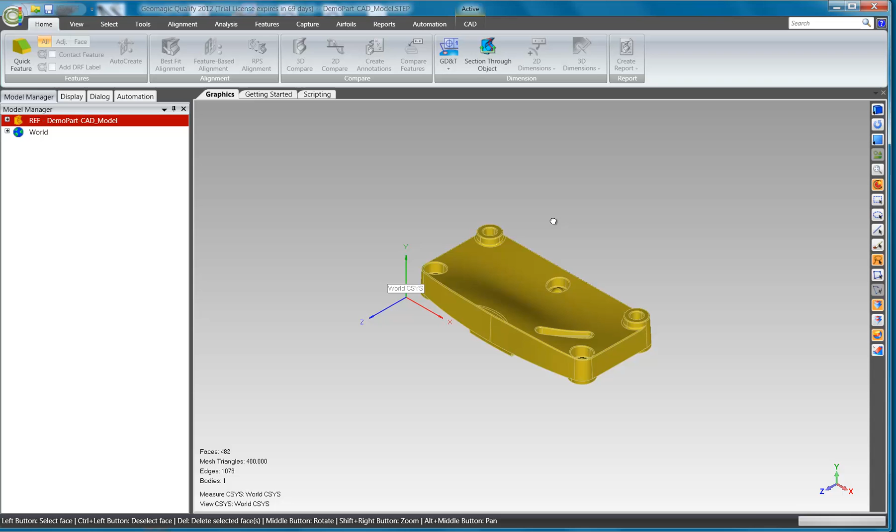First things first, when we're using Geomagic Qualify Probe, we want to import our CAD model, which I have here sitting on my screen already.

Then we will want to make sure we have our microscribe digitizer plugin set up. We'll go to the Start menu, Options, then go to Digitizers, and make sure that the hard probing plugin is microscribe version 1.0. Press OK and we're ready to begin.

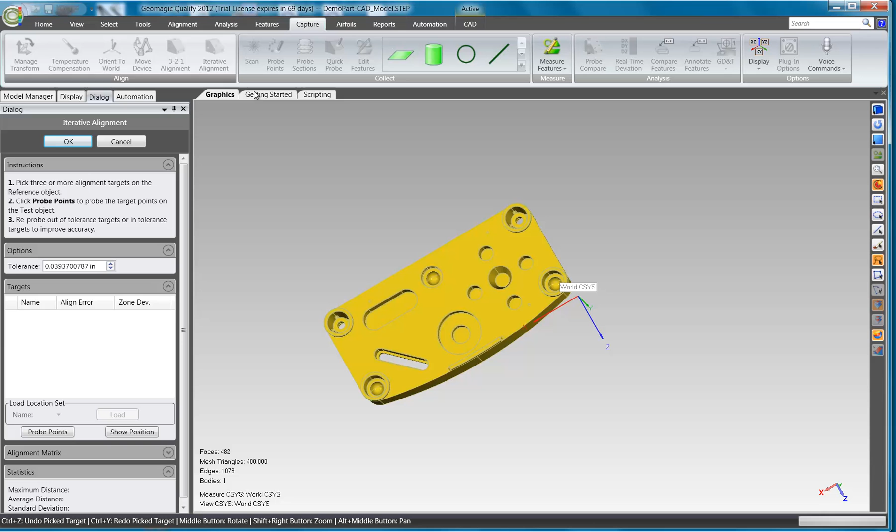We'll start by using the Capture tab, and for Geomagic Qualify Probe users it will be under the Alignment tab, but we'll be using the iterative alignment. This allows us to create target points on our CAD model that we can reference on the actual object sitting on our desk to align this part.

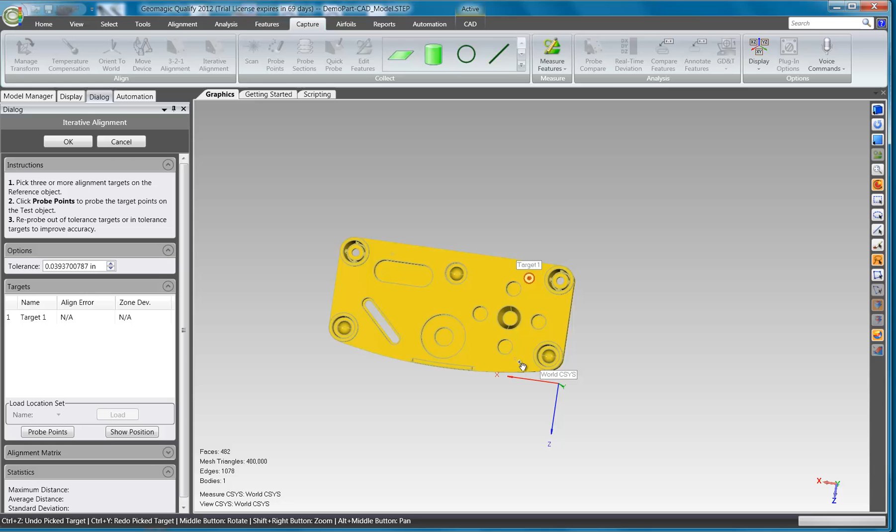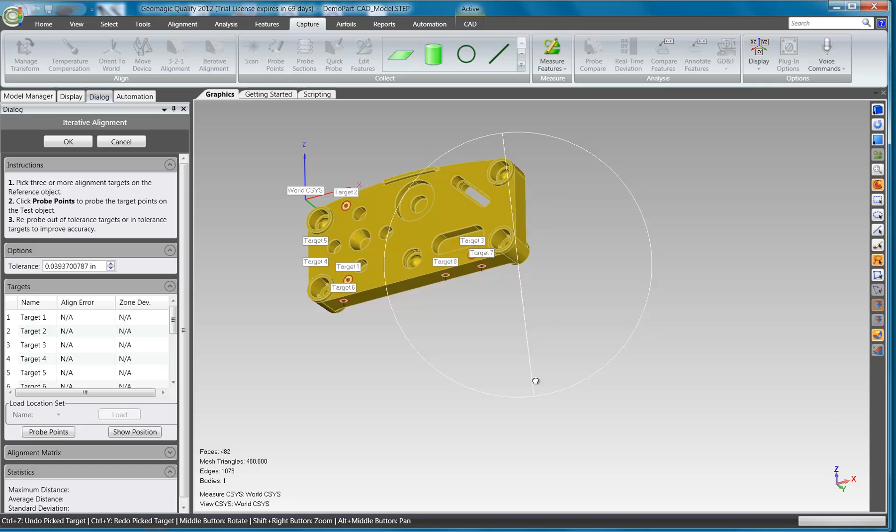So we'll simply start by creating a few targets. Place one here, one here, one here. Go off to the side, place a few targets, go around back, place a few more. What we want to do when we create these targets is make sure we have a good reference plane and good driving points that will allow this CAD model to fully align to the actual part.

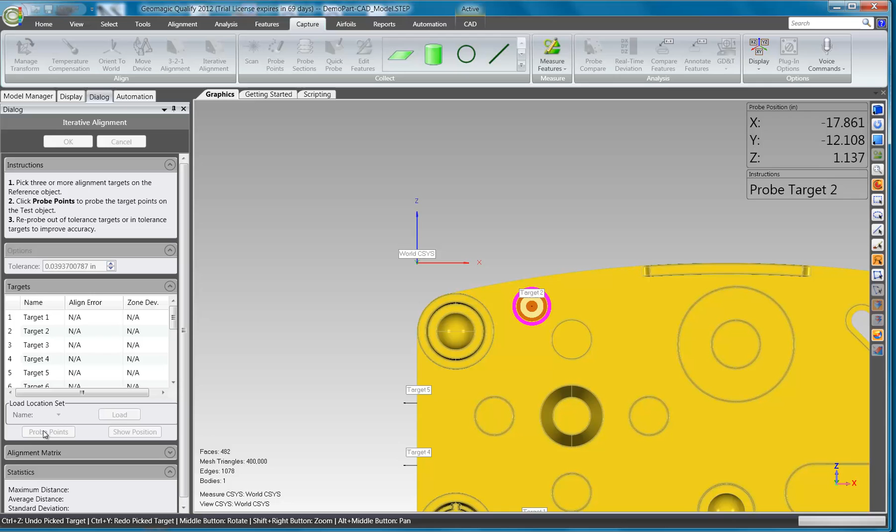We'll take just a few more points and then go ahead and probe them too. To probe the points, we'll press Probe Points, and it brings us down onto target 1, which is the first target we created, and we will take a point. For the first 3 targets, we'll just have to get close to where we put them on the CAD model, and that will give it a basic alignment. Once we do that, it brings a probe into place that we can use to get close to the part.

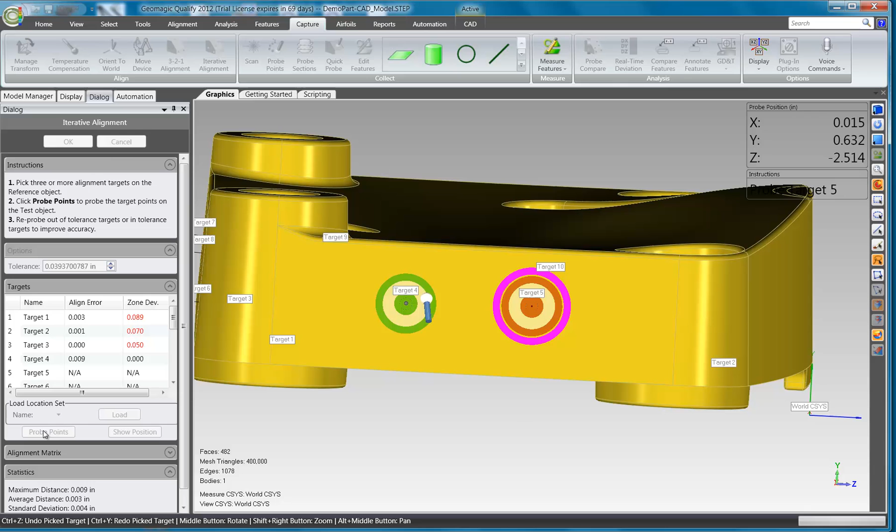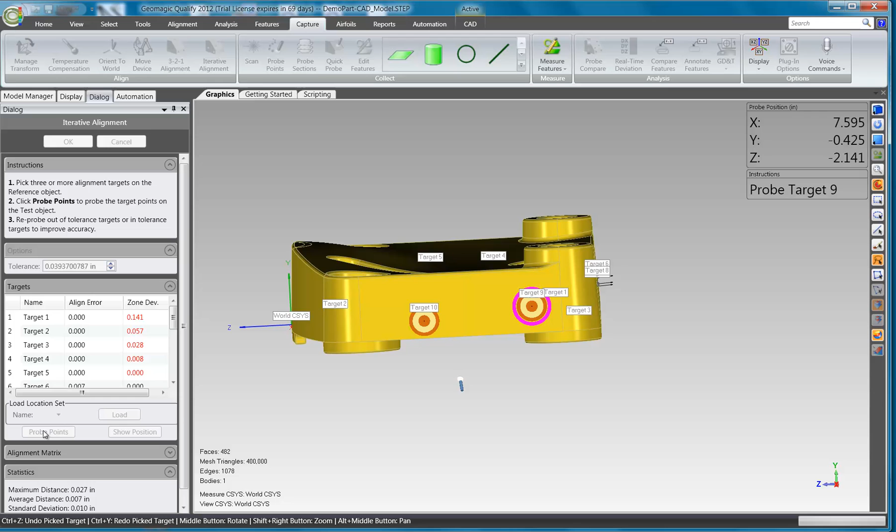You can see it lights up green when we're actually within the target specification for tolerance. We'll come in here and take a few more points. We'll also note that this procedure will fail the first time, just because there's no way we can get the first 3 points absolutely perfect unless we're very careful. Just keep that in mind when we're doing this.

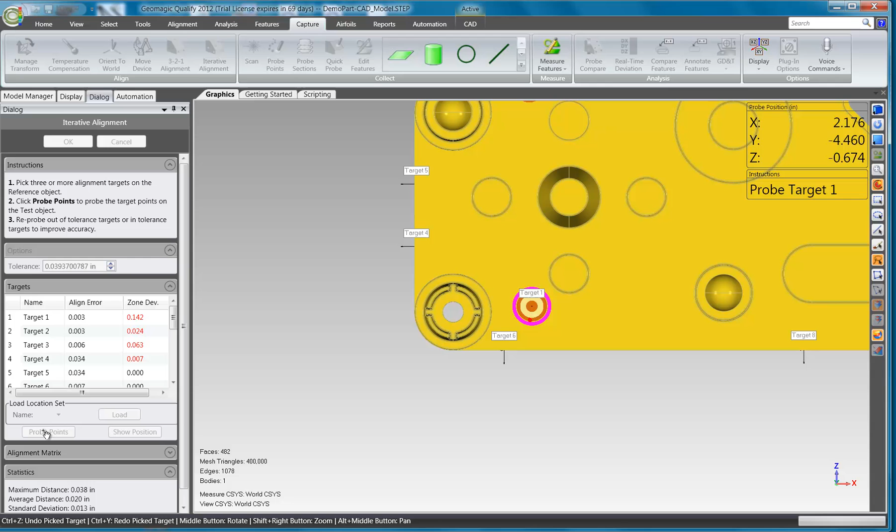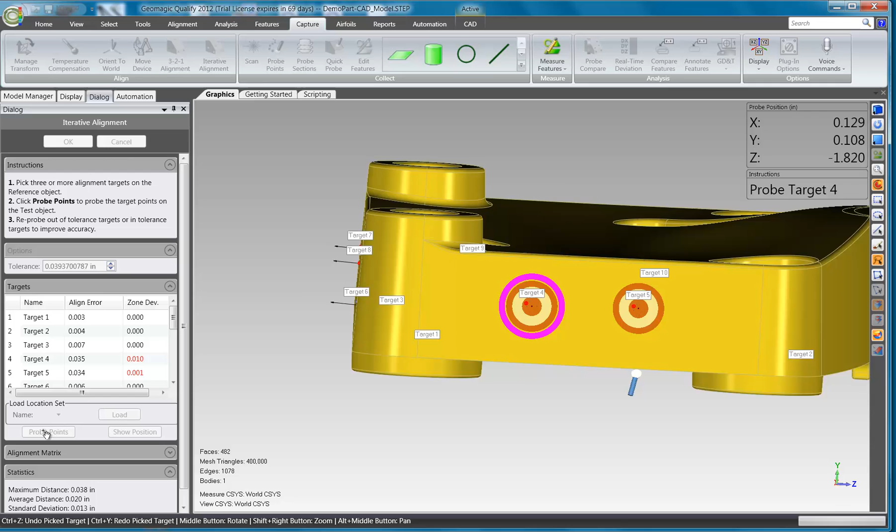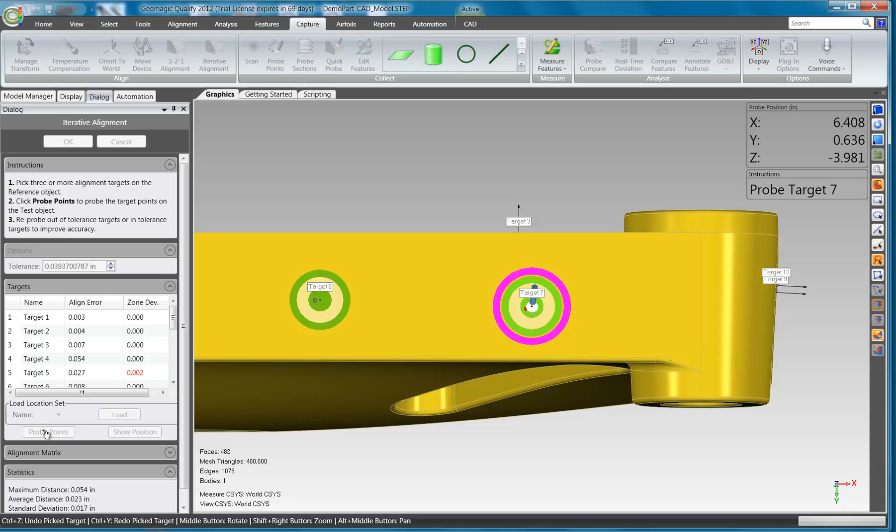So it says it failed. We want to do these points again, which is fine: target 1, target 2, target 3, target 4, target 7, target 8, and now we are fully aligned.

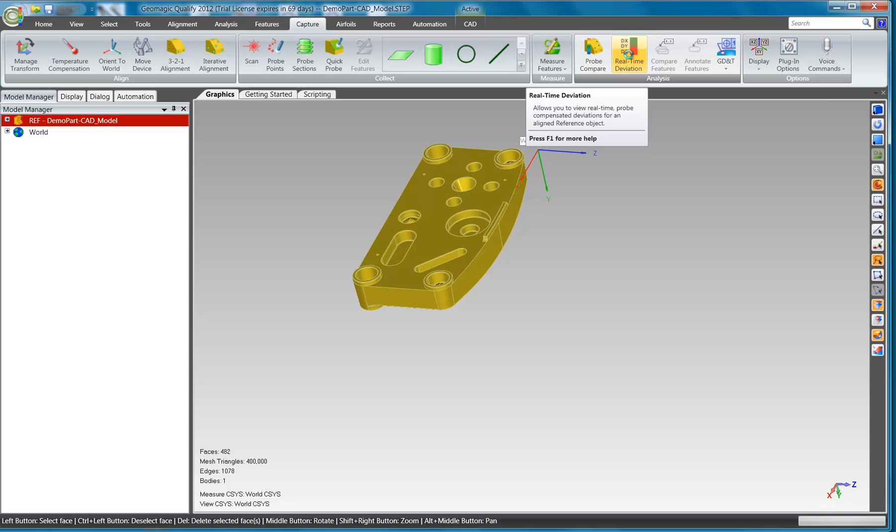Now that we're fully aligned, we can press OK and start taking a look at our model. So we have a few different options. We have our real-time deviation that we can use to look at the model, which is just a real-time go/no-go gauge. You can see when we come down onto the part, it gives us our tolerance, and it says that we're good to go on this surface.

If we come off of the part, you can see that's obviously a no-go. So this is an easy way to come in and check if things are where they need to be. We can see that we're out a few thousandths on this bore. However, on this surface, we're also a little out as we go off to the right of the part, and as we move to the left, we come back into tolerance. So there's a little bit of warp going on as we get further to the right of the part.

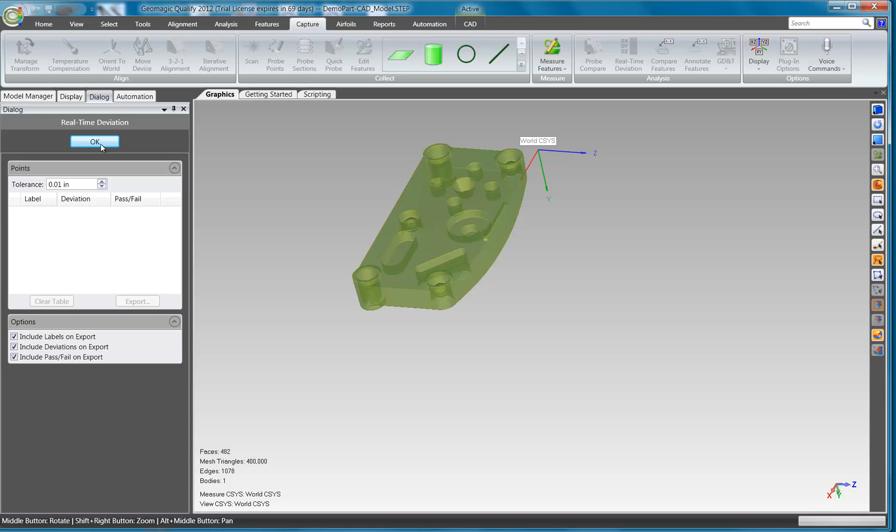So say we want to further analyze that information. What we'll do is come in and use probe compare, and use it to first set up our tolerances. Let's say our tolerance is 7 thou for our nominal, and for our critical numbers we'll run that out to 20 thou. Alright, and then we will start probing.

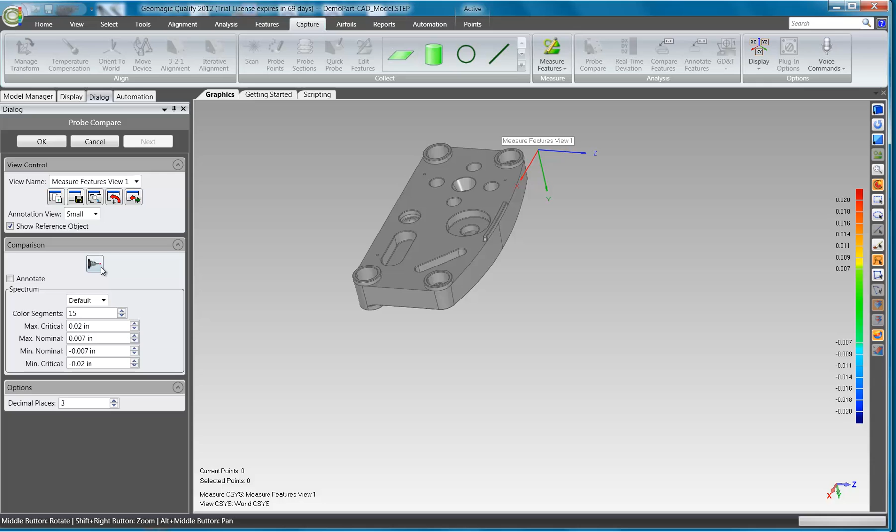Come in here, and now we just start taking points on the part. So we'll start getting a color map of the particular pieces and parts of the model. And if we just take these points, you can see very quickly how we can start to understand the slope that's going on here.

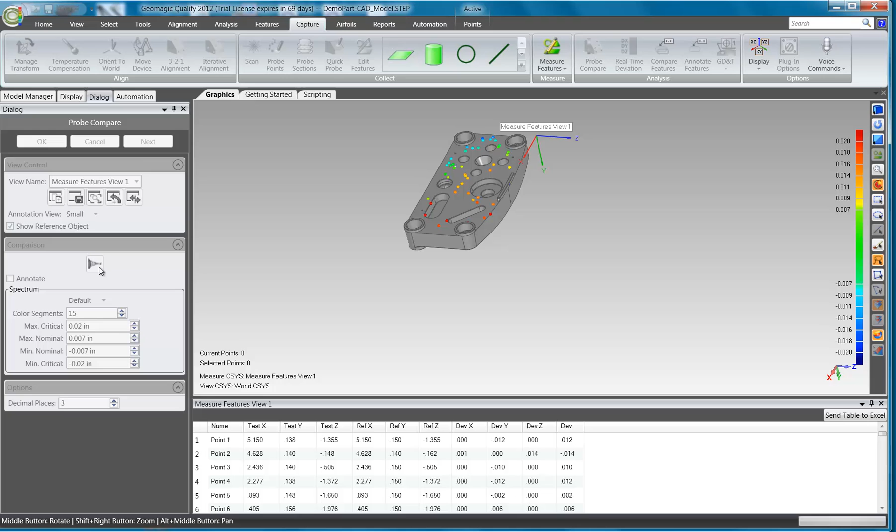So we will press the top button for the microscribe to exit out of this procedure, and you can see all of our icons lighted up again. Now we can look and see that there's a nice color map going across the part, and we can see the sloping that's occurring on this object.

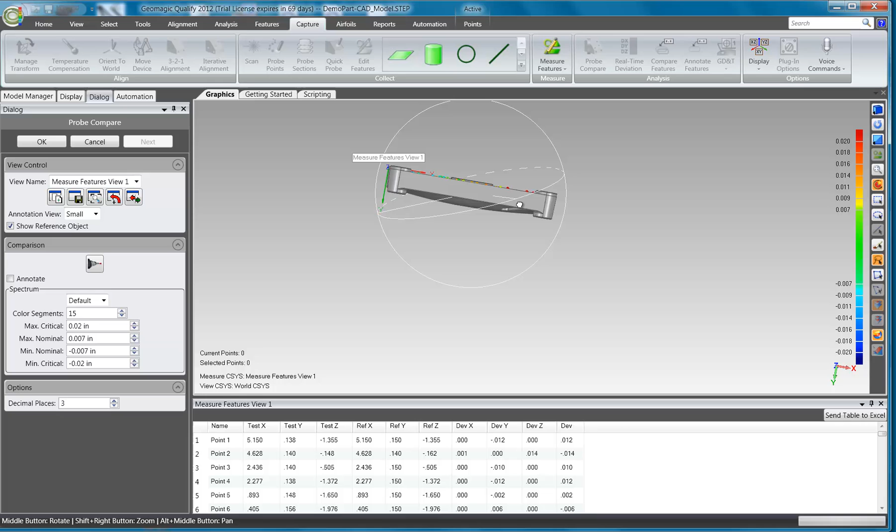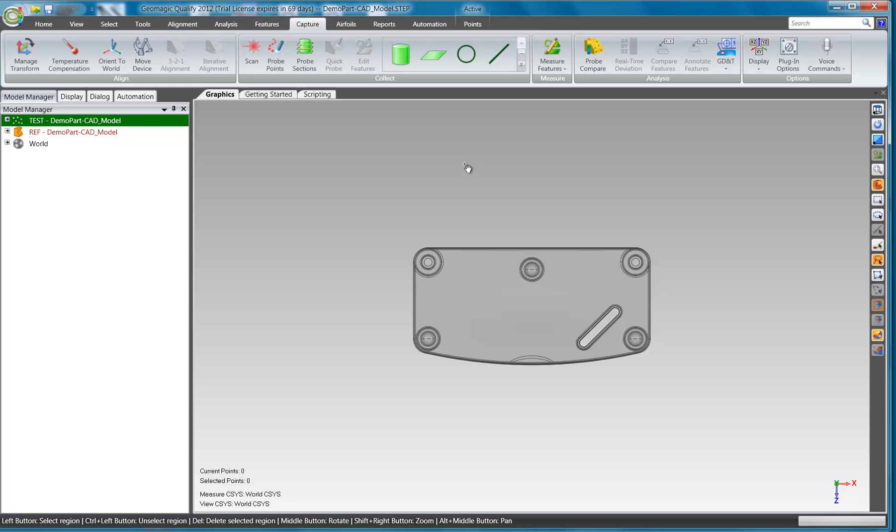So now we'll go ahead and press OK. And then we will come in and start probing some features. We have quite a few features that we can probe. Let's start off by just probing some cylinders. So let's come in and probe a few cylinders. We will come in to our cylinder and start taking points along this cylinder. We want to come all the way up across the top and all the way across the bottom.

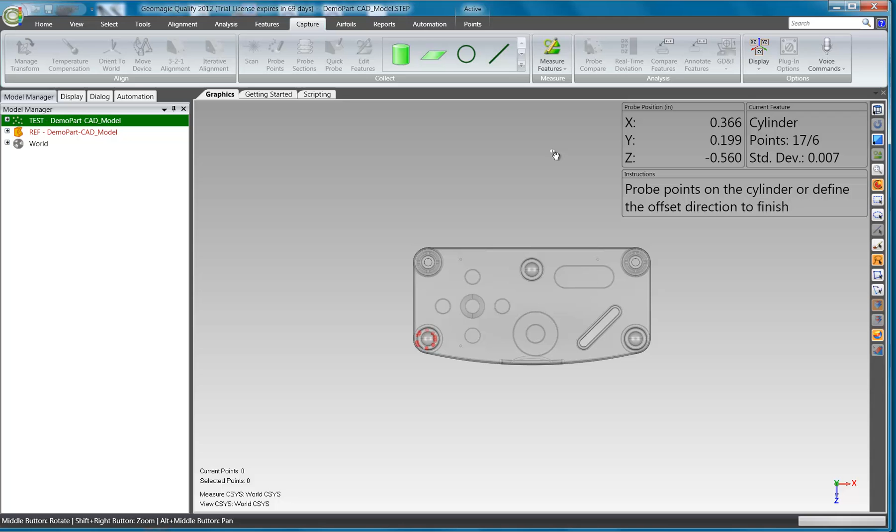And then once we're done, we will press the top button to create that cylinder, which we can see is actually offset from our CAD model. That's because I shifted this microscribe digitizer just ever so slightly in order to give us some deviation to work with, hence the reason why we're seeing slopes in the part and things like that. That allows us to have a little bit better idea of what we can do with this CAD package.

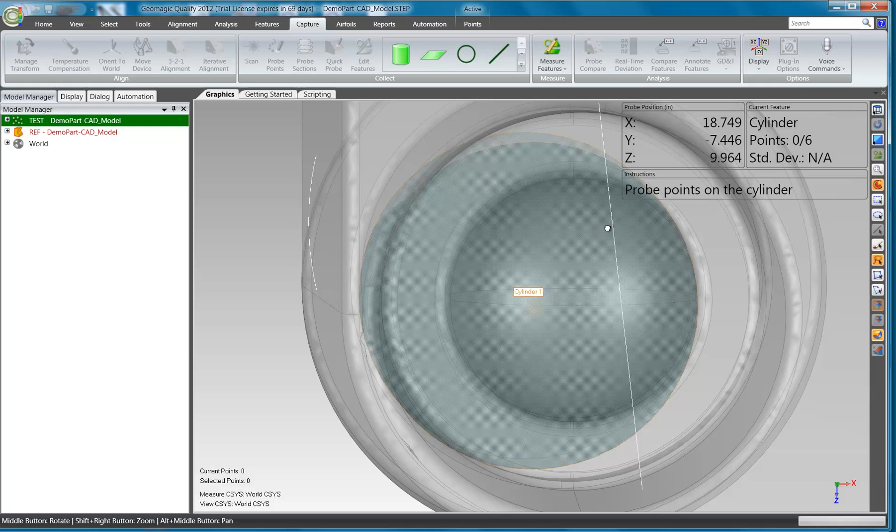So you can see, we can see the offset. We can also note the diameter difference between the two cylinders.

Okay, so now we'll go ahead and probe the next cylinder. So we'll go ahead and do that now.

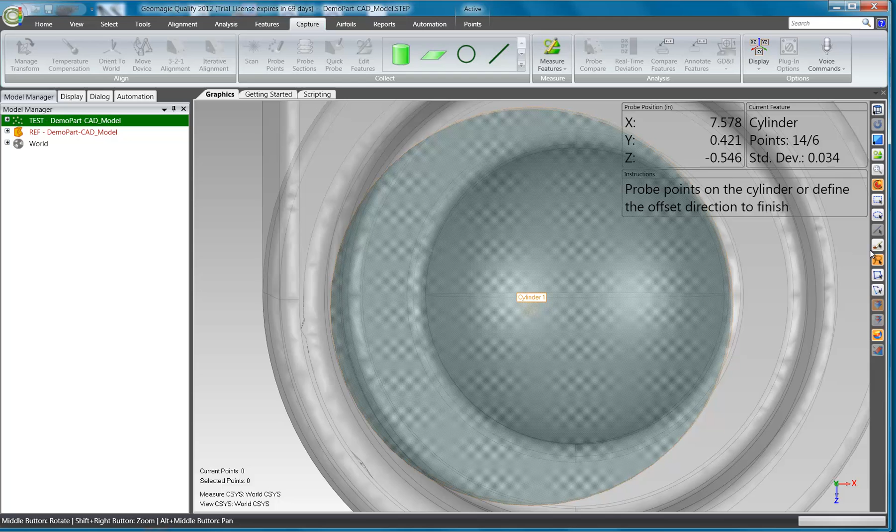Alright, so we can see that difference between the two cylinders. So say we want to further analyze cylinder 1 against cylinder 2.

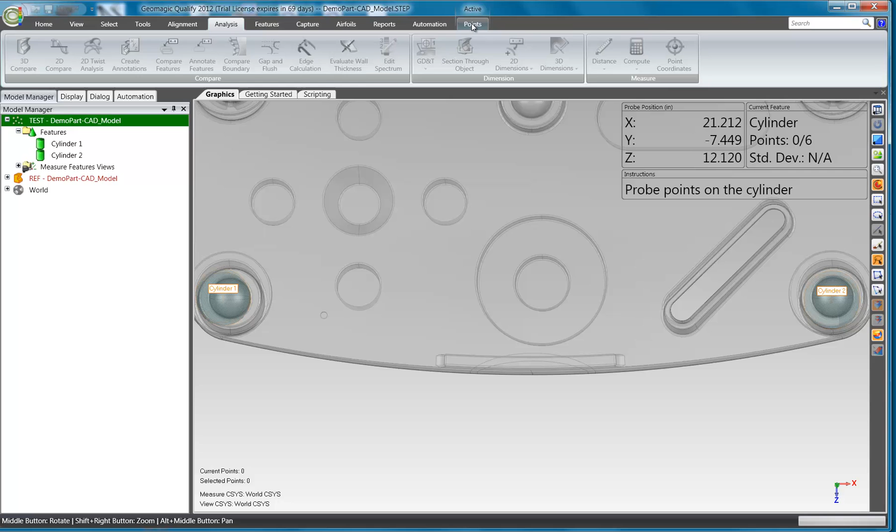Well, what we'll do is go to Analysis, Features... my apologies. First off, we'll want to go ahead and exit the procedure by pressing the top button on the microscribe. That will allow us to come in and do our analysis.

So we'll go in and create 3D dimensions. Hide this work plane, and we'll just go ahead and do some point-to-point comparisons from cylinder 1 and cylinder 2. So by selecting anywhere on the cylinders, it automatically drives to the center point, and then by selecting an area out in space, we get that distance.

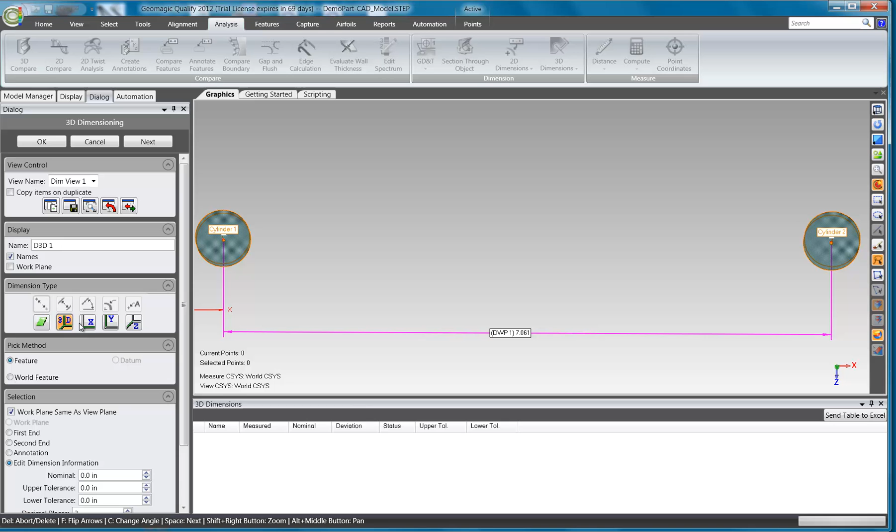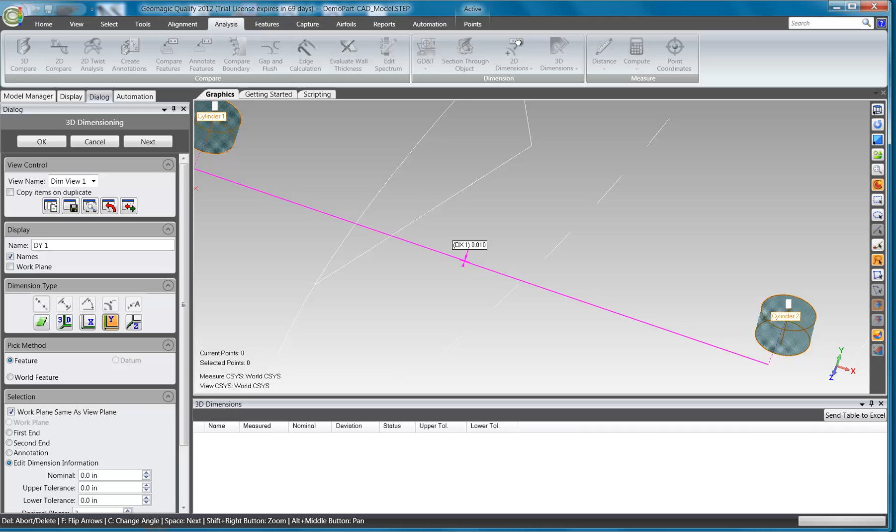So we have a view plane distance we can look at, our three-dimensional distance that we can also look at, and then what is most important is our distances in relationship to the CAD model itself. We can see that by looking at the deviation in X, the deviation in Y, which will not be as important for this part, and also the deviation in Z.

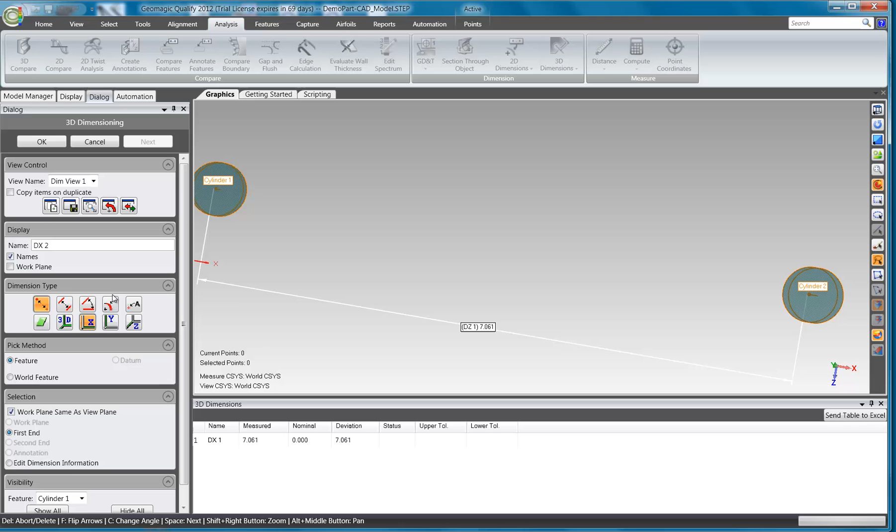So linearly we can see how far they're off, as well as we can compare the distance from cylinder to cylinder in X. And then by pressing Next, we can move on to any other features, and you can see we have distance in parallel. We can also check angularity between two planes and things of that nature. So we'll go ahead and press OK.

And let's look at creating a plane and what we can do with this plane. So inside of our capture function, we have the ability to create cylinders and lines also, but we have this plane function. So let's go ahead and create two planes.

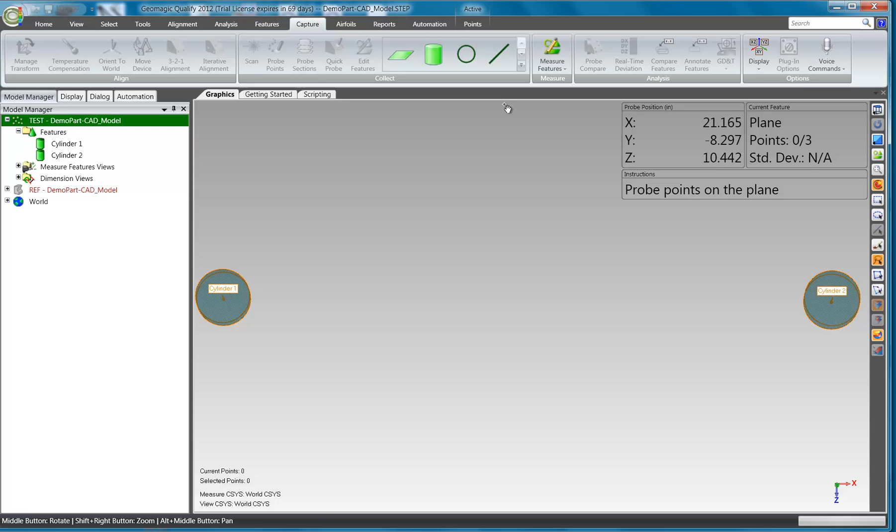And say we want to understand the corner of a part. Well, this corner can be quite difficult to understand sometimes with a digitizing arm, simply because it's very difficult to get perfectly on the edge or corner of that part.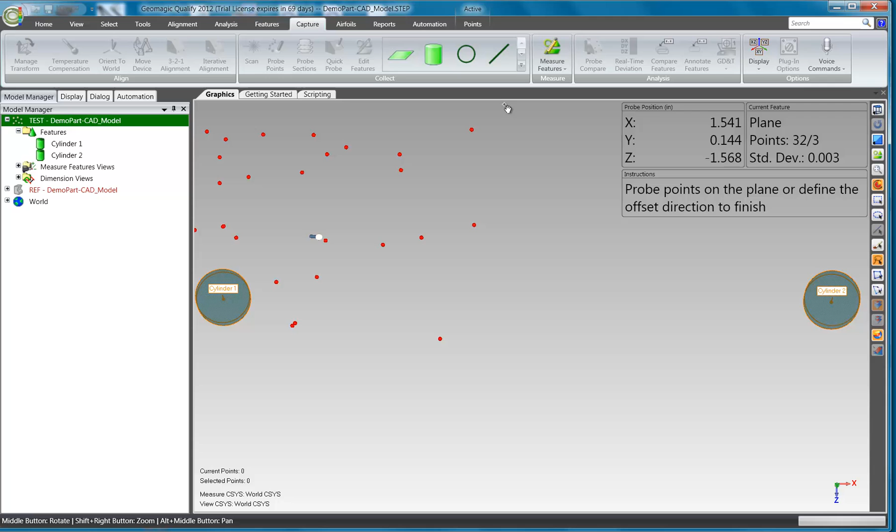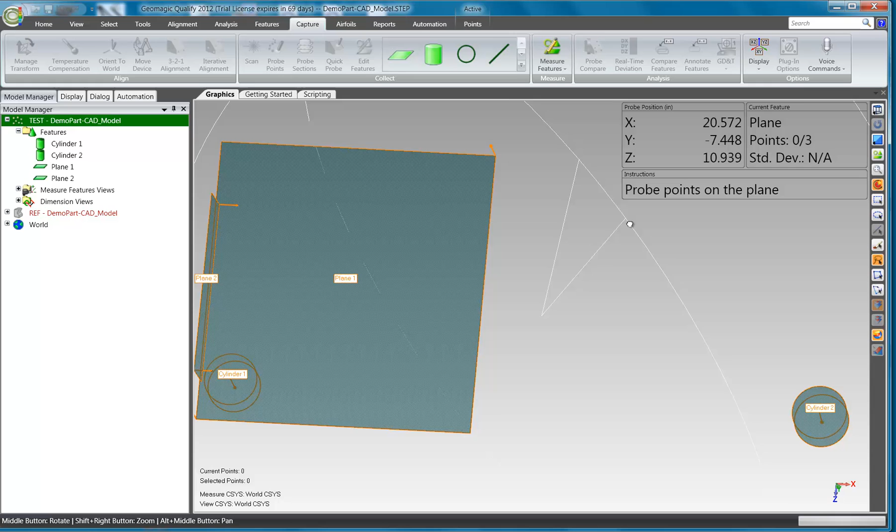What we can do with these planes is simply create one plane, create another plane, and then come in and look at the intersection of these two planes.

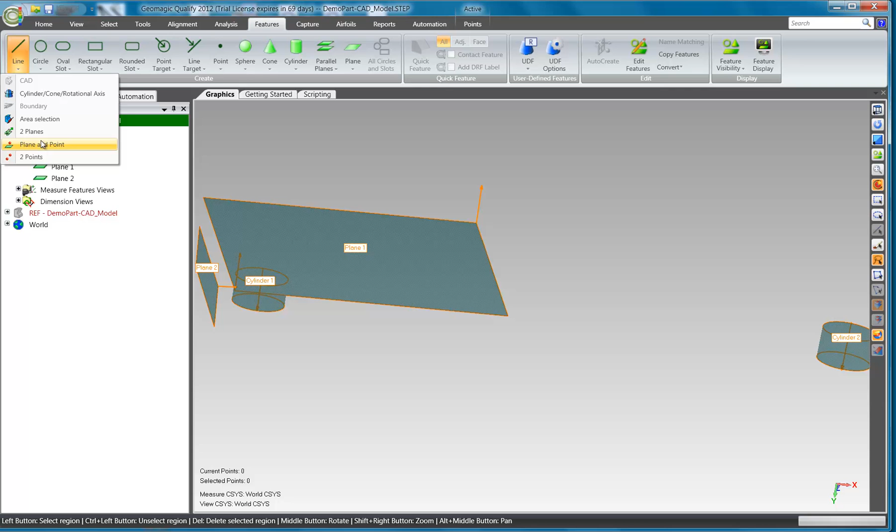The way we do that, and with the intersection of these two planes, we can create a line. So again, we press the top button on the hand switch for the microscribe to exit out of the function, and then for lines we'll select two planes, plane 1 as plane 1, and then plane 2 as plane 2, or we can do vice versa, and then press apply, and you can see it creates a line directly where these two planes intersect, giving us our corner.

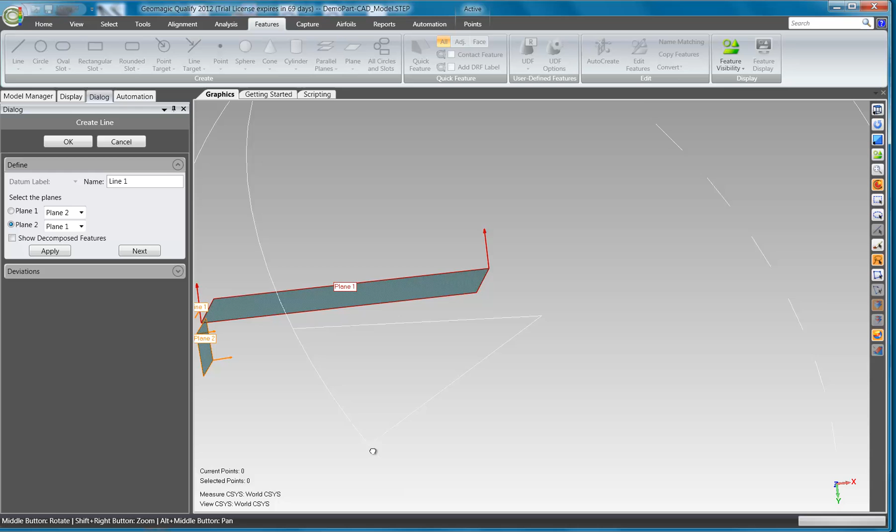This gives us a much more accurate way to create these corner lines, and we can drive that throughout the whole part and then measure these corners from one point to another in X, Y, and also Z to get our full understanding of what's going on with our part.

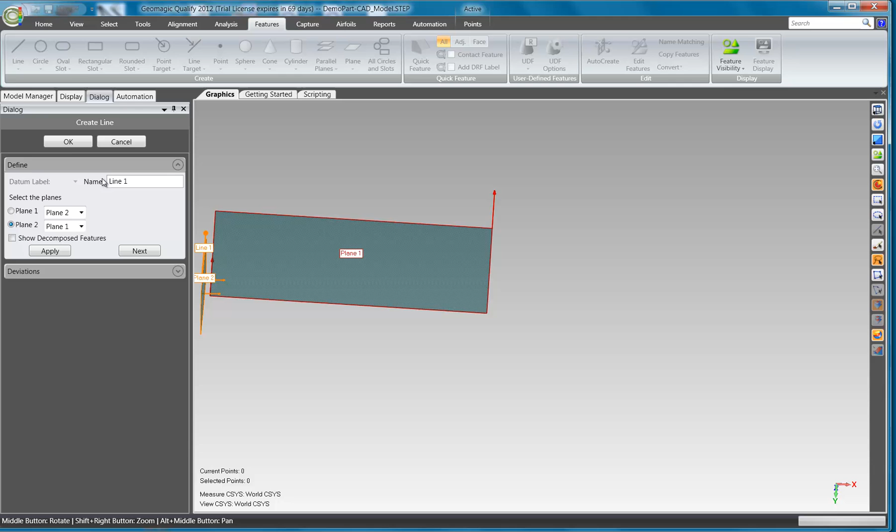These are just a few of the tools that we can use in Geomagic Qualify Probe. This will hopefully help you get started in using Qualify Probe. I would experiment with different pieces and parts.

Also, one more thing to note is we need to go into plugin options when you get started and go to tip options and make sure we set this diameter to 0.003 for the default MLX tip, or for the G series arms we'll just leave that at 0.

So that was the reasoning behind the cylinder difference in this part. When we had the cylinder sizing was slightly smaller than it should have been, I'm using an M series arm that I didn't enter the diameter for. That also accounted for a little bit of that angularity and some of the tolerance issues that we were seeing. So if you run into that, that's what's going on there.

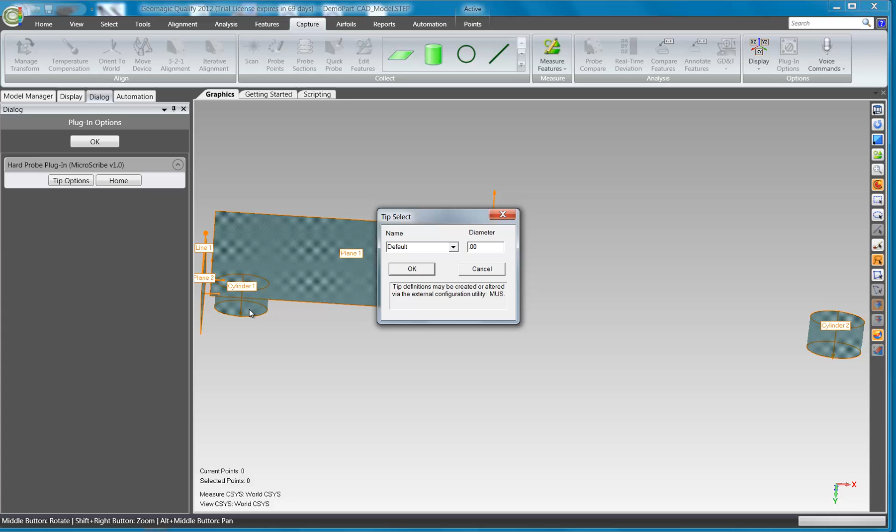So for an M series arm, it's 0.003, and that will get you your default tip size. Then you just press OK, and then you are good to go.

So I would continue playing around with Qualify Probe. You can do probe sections, probe points, and then use those to do comparisons in many different ways. So we'll come out with future videos regarding those different methods that we can use. But for now, this is a great getting started video for Geomagic Qualify Probe.